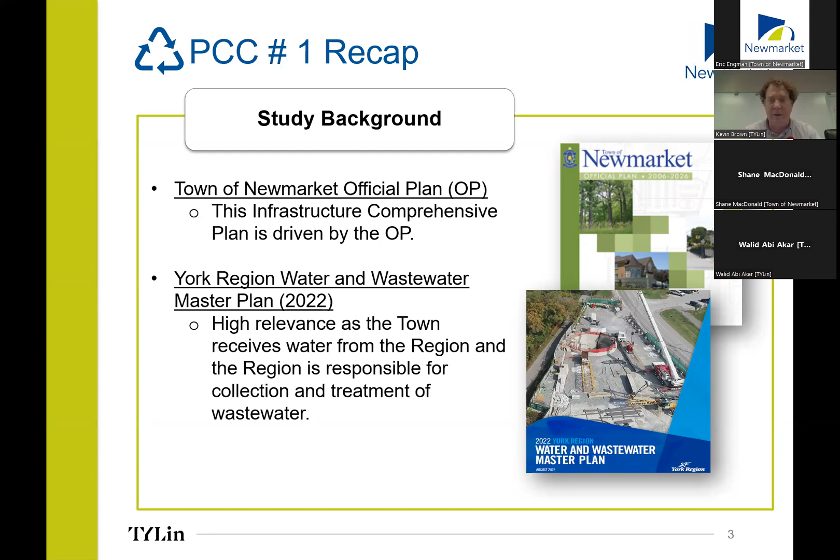While we are planning for servicing upgrades and infrastructure upgrades to support growth within the town of Newmarket, the region is also doing the same across Newmarket, Vaughan, Markham, Richmond Hill, and all the other 13 or 14 different municipalities. The overall objective is to ensure that the growth being planned for Newmarket can be accommodated without any adverse impacts to residents in terms of water and wastewater servicing.

We want to make sure that water servicing and pressures at your homes or businesses are not drastically impacted, and that the sewers have got enough capacity to convey all that wastewater out of the town to get treated properly. We've done some modeling and forecasting to identify what the water demands and wastewater conveyance requirements are going to be townwide, and we've identified some infrastructure improvements we believe are going to be required.

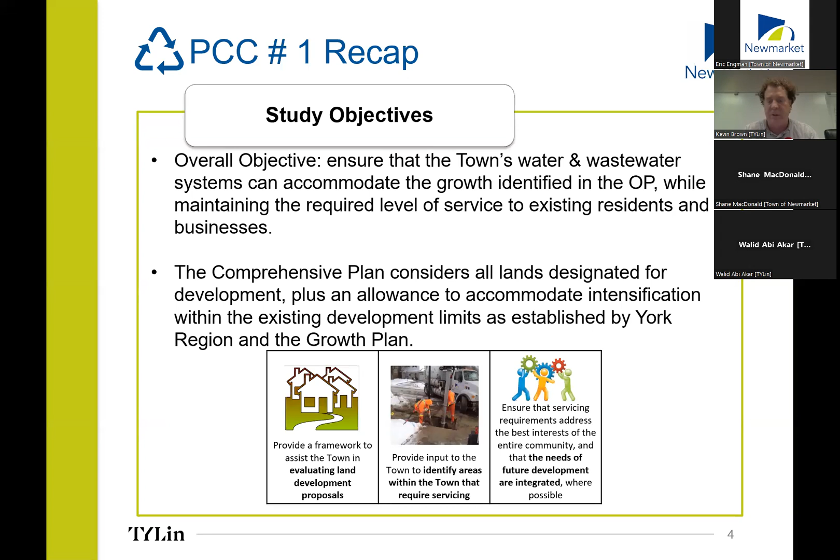The important thing to recognize too is that this growth is mandated by the province. The province has a growth plan that establishes the housing needs and population accommodation needs through the long term. These growth targets are not established by the town. The province identifies what regions they expect growth to occur in, and York Region is expected to take up a certain percentage of it. York Region, working with municipal partners like Newmarket, Vaughan, Richmond Hill, etc., establishes how much growth is generally going to be feasible in each municipality.

So what we're seeing here is that growth through 2051 will take the population from 88 or 90,000, where it is right about now, to increase by about 30,000 over the next 30 years. So a similar pace of growth that Newmarket has experienced over the last decade.

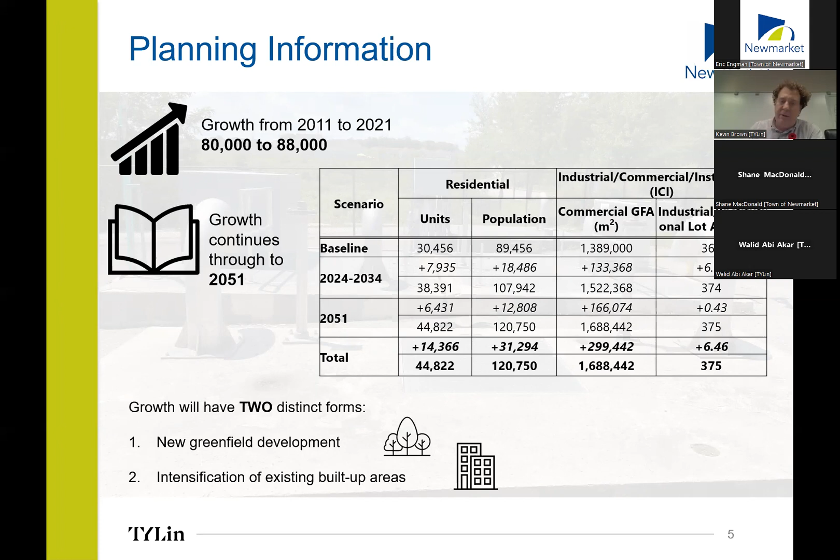Now, this master plan is following the Class Environmental Assessment process. It's a process established in Ontario to ensure that projects undertaken by municipalities go through a process where the natural environment, the sociocultural environment, the cultural environment, and financial elements are all taken into consideration. It's a bit of a weighting process that's evaluated as well, so we need to make sure we're identifying projects that have the lowest overall net impact and that are financially viable.

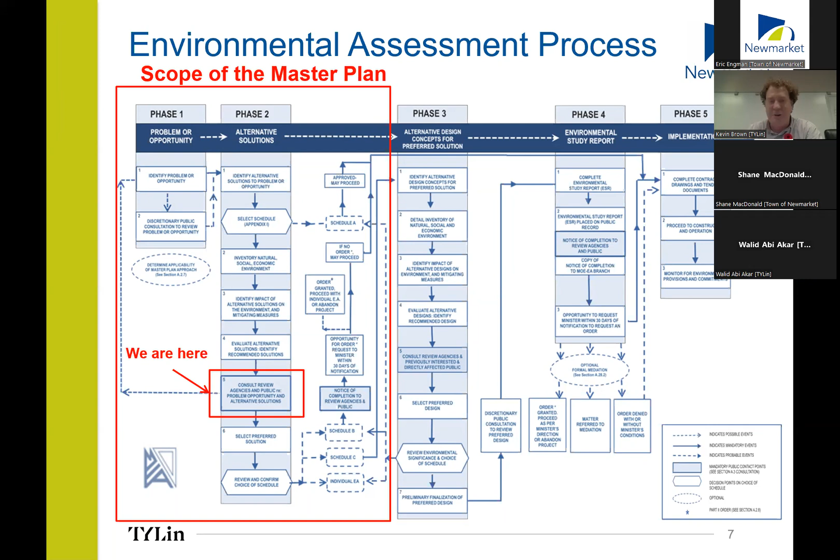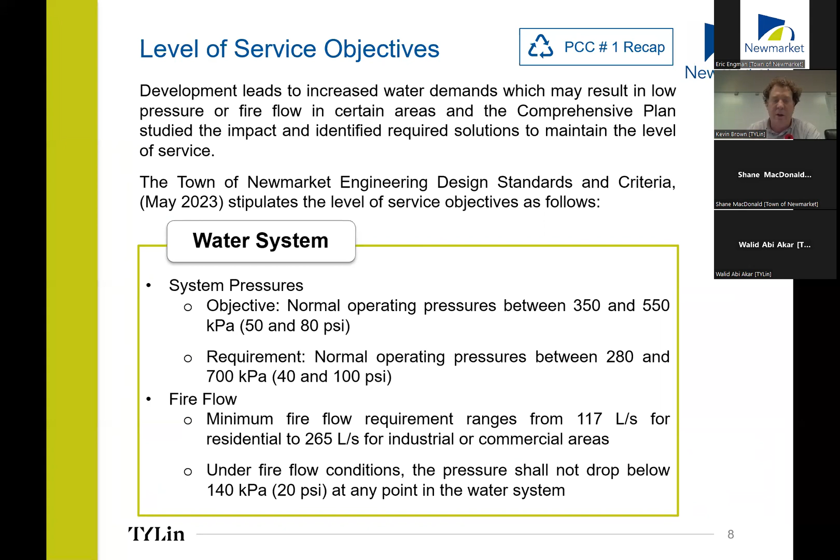Okay, so again, phase 1 recap. There are a number of level of service objectives. We want to make sure that the level of service for the water system, overall system pressures and the availability of fire flow, can be maintained. As growth occurs, as there are more users, you've got more water flowing through the pipes, there's greater friction losses, and pressures can drop. We want to make sure pressures stay within a reasonable range, and that the ability to fight fires isn't compromised by additional demands on the system.

From a wastewater system perspective, again, we want to make sure the pipes are big enough. Generally the same idea as the water system, so we can safely get the wastewater away without undue risk of sewer surcharging or basement flooding and the like.

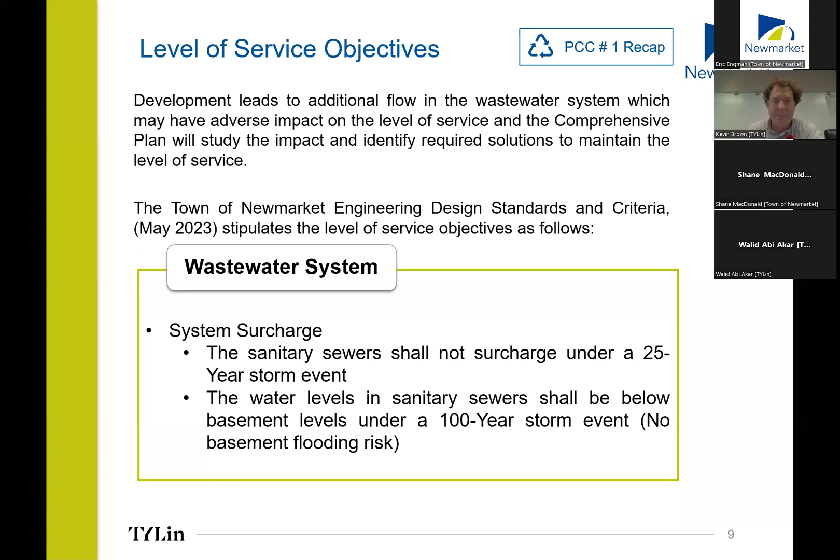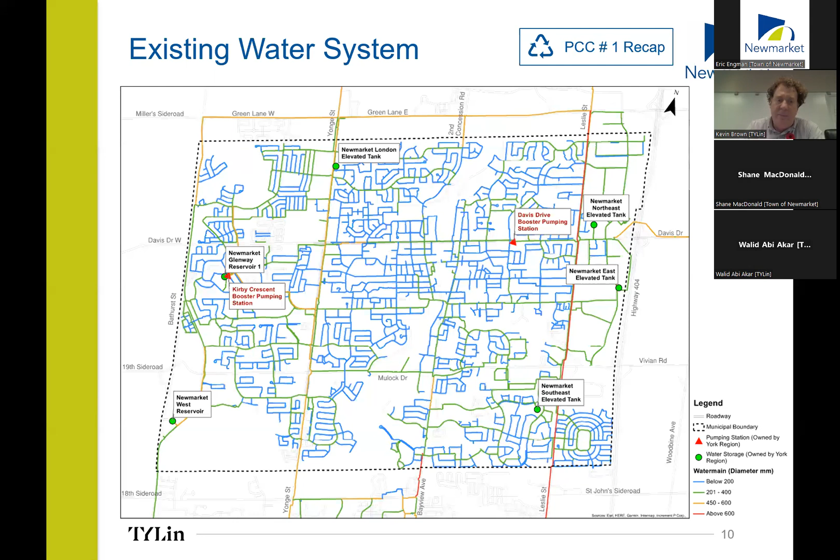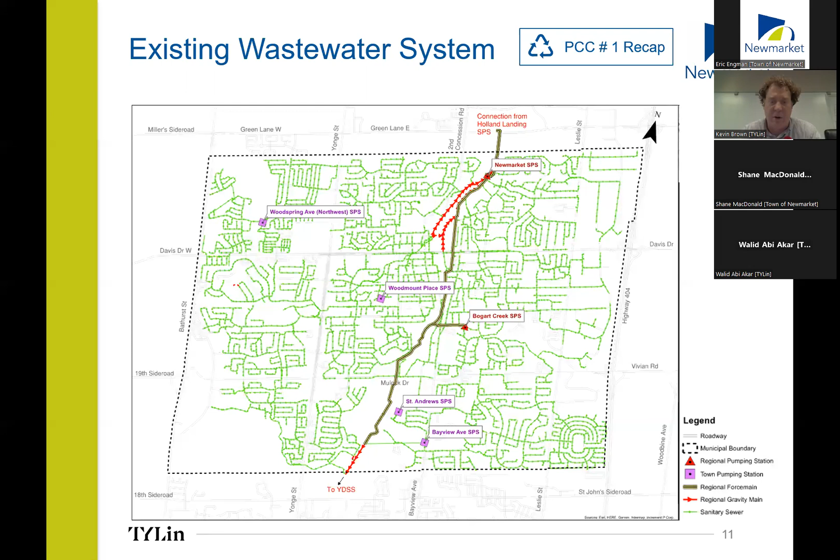So it's just an overall review of the network and the wastewater system. It's almost pretty much everything is town on this map, except for the regional trunk sewer that runs along the Holland River Valley. Basically everything flows from high to low points, so all the wastewater generally flows towards the middle of this map, ultimately connecting to the region's trunk sewer, and then gets pumped out of Newmarket through 2 regional pumping stations, the Newmarket Sewage Pumping Station in the north and the Bogart Creek Sewage Pump Station largely in the middle.

That Upper York servicing infrastructure was intended to include a new sewage treatment plant, a water reclamation center I believe it was called, up in northern Newmarket or just north and east of Gwillimbury. That project has since been reevaluated, canceled in effect, and instead of treating some of the wastewater locally, the region is going to be looking at implementing upgrades to the York-Durham sewage system, which is the major sewage collection system that takes the wastewater down to the treatment plant down in Durham region. So there will be some changes to the region's plan.

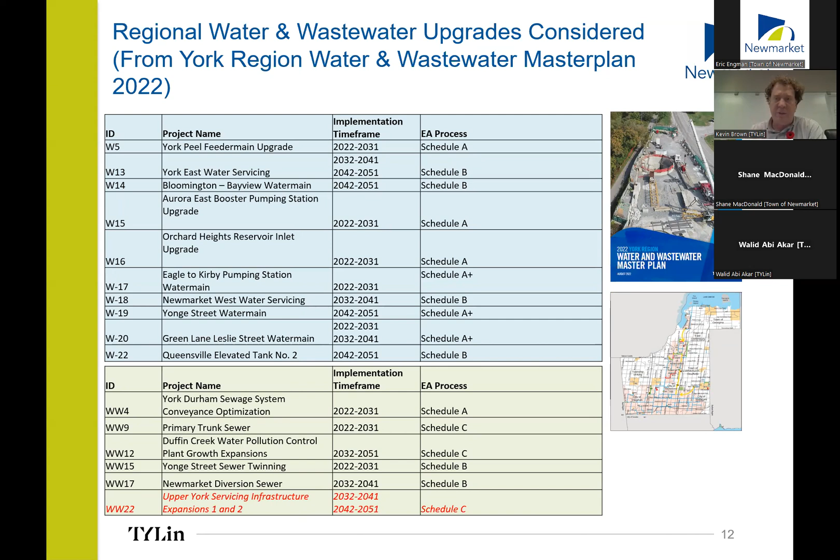The overall process: we look at a series of planning scenarios. There's the baseline, the existing conditions. Then we look at the existing infrastructure in the ground and do hydraulic modeling of the growth forecasts, where people are going to be moving to. That's where additional water demands or wastewater flows are generated from. Then we run computer simulations - really just a series of calculations. It gives us a sense of how wastewater flows increase downstream, or how pressures in the water system are impacted.

So then we do an impact assessment. We identify areas where the level of service will not be met when you combine the existing pipes with, for example, the 2051 growth projections. Then we go through a series of steps trying to identify reasonable upgrades to address or mitigate the impacts of growth.

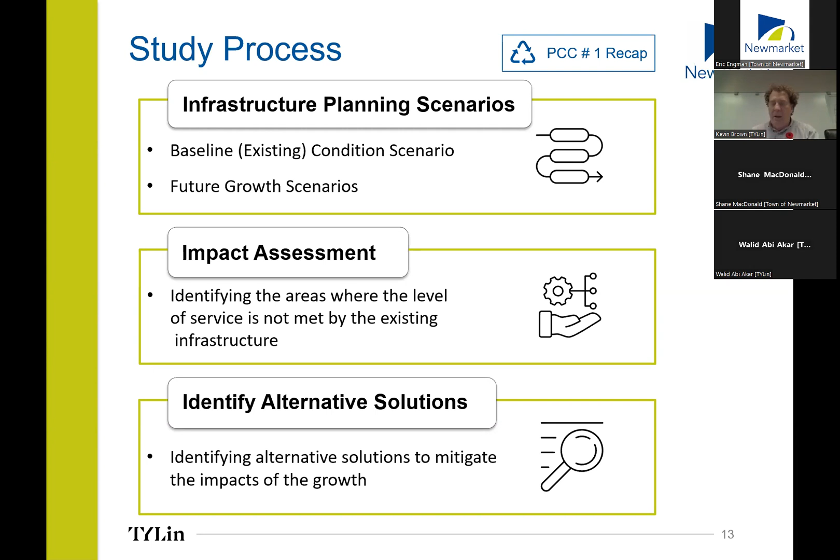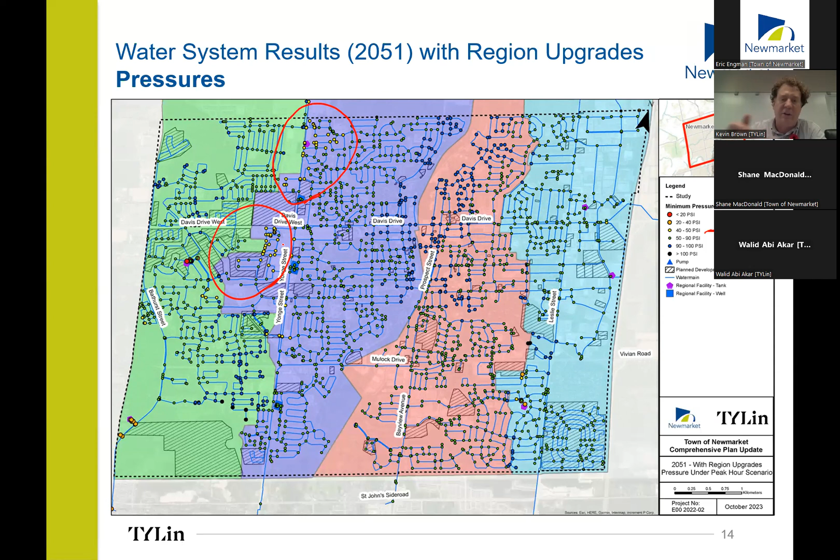There's a couple of pockets in the west in particular where we see pressures dipping a little lower than we'd like. These are areas we'd be looking to address, these low pressures that could occur as a result of development over the next 30 years.

Many of these are at dead ends in residential cul-de-sacs. It's a fairly common occurrence because if you're on a main through street, you're connected to a network of water mains, and water can flow from two different directions to come out of a hydrant. If you're at the end of a cul-de-sac, you're basically at a dead-end water main, so water can only flow in one direction. Without getting too into the theoretical details, if you double the velocity in a water main, you quadruple the pressure loss along that main. So it can be difficult to service cul-de-sacs.

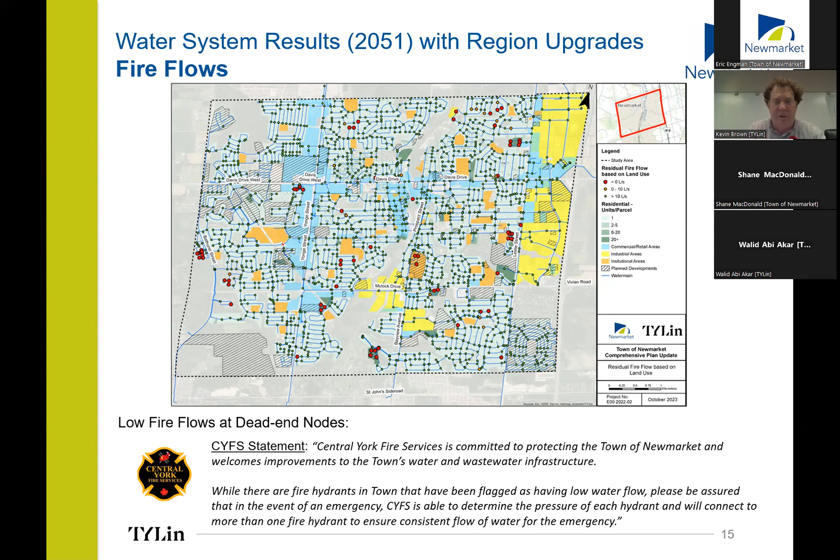So that's where we're seeing potential deficiencies in fire flows. And overall, as we identified a couple of slides back, most of the low pressure areas were located in the northwest.

This also shows the hatching. There's a bit of a greater concentration of planned developments up in the northwest, the most notable of which is the Upper Canada Mall site at Davis Drive and Yonge Street. So that's where maybe a disproportionate amount of growth is going to be occurring over the next 30 years. We've identified a few projects up in that area. Everything else looks to be pretty good throughout the town.

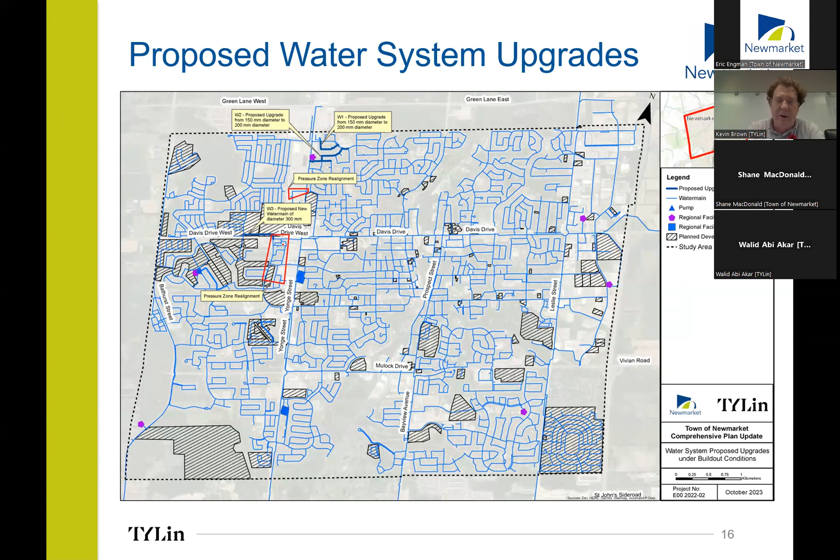I do have a little zoom in of that area to assist you in seeing what the projects are. So W1, W2, water project 1, water 2, water 3. This is not a hierarchy, we just numbered them largely north to south. So there's going to be some water main improvements to accommodate some of this growth.

We're also identifying a couple of areas in red where we're proposing to move these lands from high elevation in the lower pressure district to being at a lower elevation in the higher pressure district. So that will result in probably a noticeable increase in pressures when those zone boundaries get realigned.

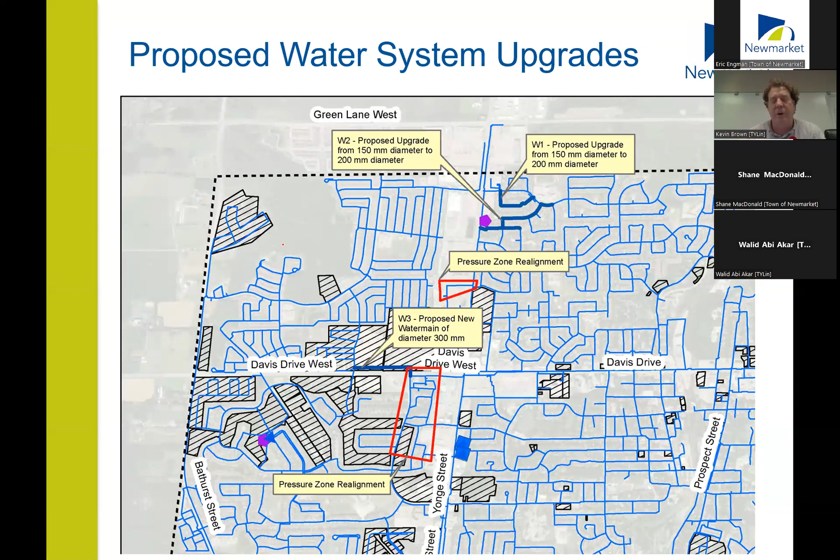But the change in pressures is largely going to be seen as a productive change or a positive change. Pressures will go up. Of course, we don't want pressures ever to be too high, because that can put a lot of strain on the internal plumbing of homes, which is why there's generally a cap of about 100 PSI. Residential plumbing, from my understanding, is generally rated to 120 PSI. So again, the town tries to keep pressures around 90 as a maximum. Anyway, a few improvements up in the northwest part of town.

Now on the wastewater side, I'll just take another water break here. Excuse me.

We try to make sure we design them for no more than 80% capacity. That way, if flows do start to creep up over time through little bits of infill development, through changes in land use, or even through systems aging and water seeping into the sanitary sewers, that it doesn't create a big problem.

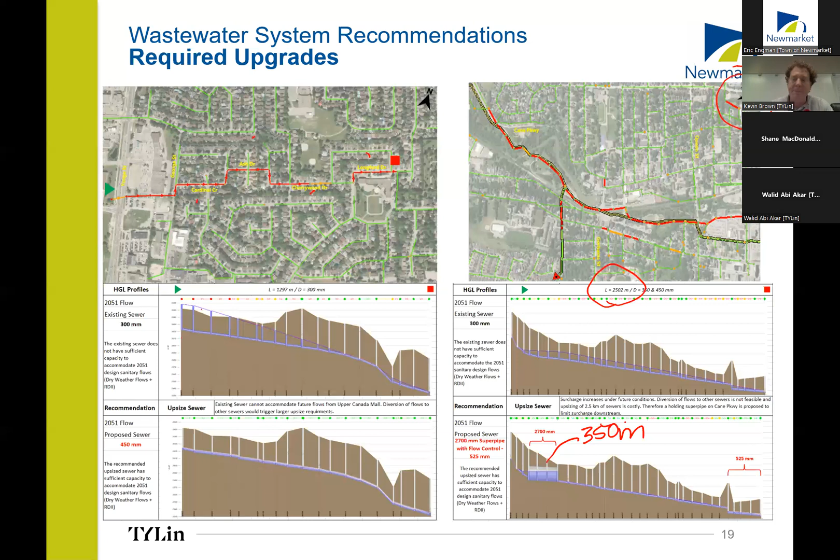So these are examples of 2 projects that we are recommending get carried forward.

Now, some of the other areas identified in those boxes a couple slides ago did have pipes identified as red, which are surcharging, or yellow, orange, which are almost surcharging. When we look at those in profile, at the existing flows or the 2051 flows in the existing sewers, there's not a huge overall impact. There's a little bit of surcharging, or getting close to surcharging, in some of these yellow segments of pipe. Over here there's a little bit greater degree, but we've got some pipes that are flatter than others, so we do see some surcharging potentially. But these sewers are relatively deep, and that degree of surcharging is minor, all things considered.

So these are projects that we're not recommending the town go ahead and undertake right away. We're recommending maybe do nothing, or in some cases we're going to recommend monitoring the sewers. One thing the town does do is monitor flows at certain locations within the sewer systems, along with the region. We're proposing that they continue to monitor and reassess the potential need for projects in these areas over time.

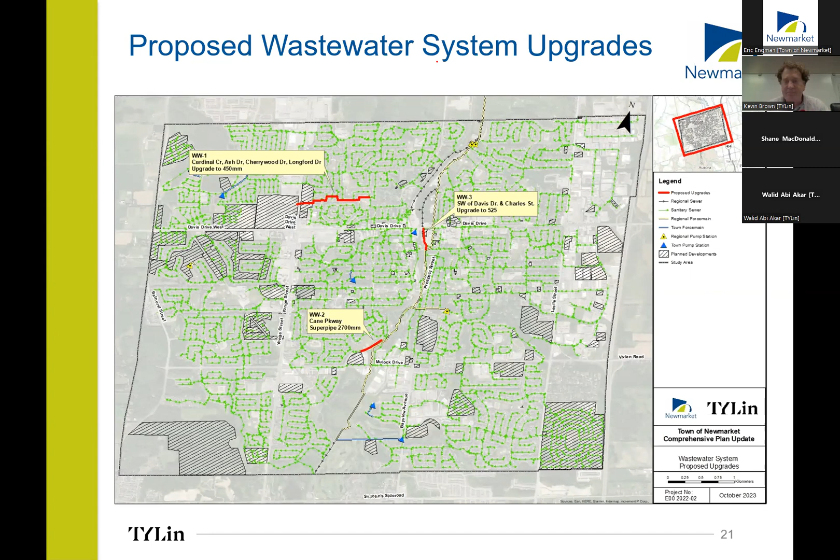So that's about it. There was a lot of work that went into this, and we've been able to summarize it in 22 slides. But as I said, we're going to update the study based on any comments that we receive through this PIC.

We're going to prepare a final report for the town, and that's going to be put on review, not just for the town, but for the stakeholders, for the residents, for all of you to review. That final report is going to include the assessment, the identification of areas with insufficient level of service.

It will also include identification of alternative solutions and recommendations, as well as an implementation plan and cost estimates. So we'll identify what it's going to cost to undertake these works. Obviously the town needs to know that so they can plan for it. We'll also try to identify roughly when we believe the projects are going to be required, whether it's tied to a specific year or to specific development blocks like we identified in some of the earlier slides.

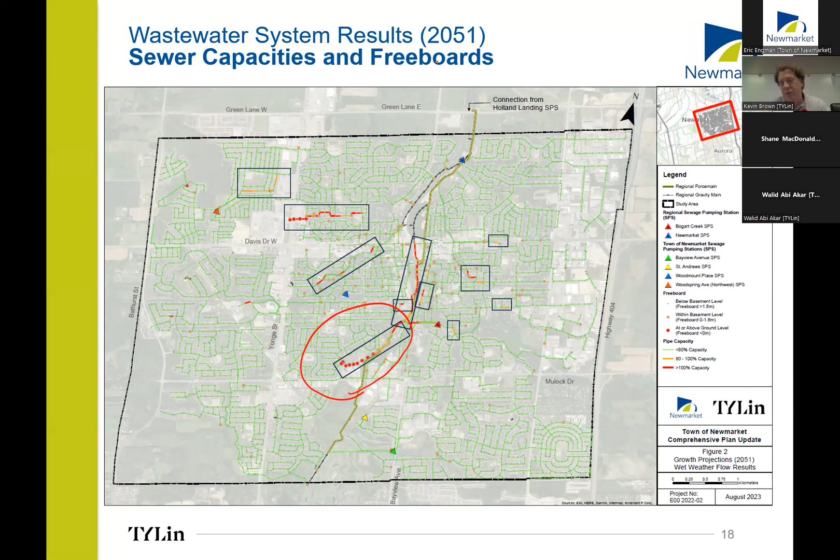I'll point out that we showed a couple of examples of the maybe 10 areas that we looked at in detail. We showed 2 where improvements are being recommended, and 2 of several where we're not proposing to upgrade the sewers. If you live adjacent to one of those other areas and want more information, we didn't want to go through all of them and present example after example.

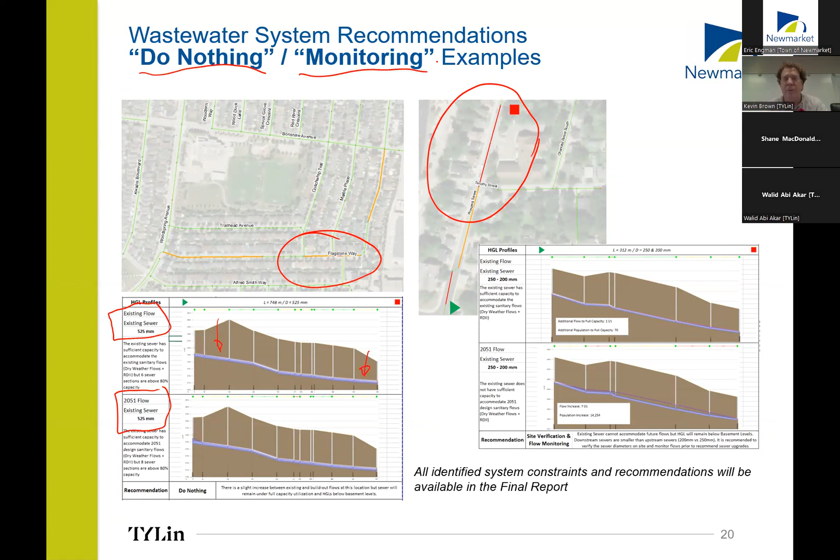But if you do have specific concerns, send us an email, and we'll send you the equivalent of these maps, these sewer profiles, for the stretch of sewer that you may have a particular interest in. That's about it. I hope I've touched on everything, and that what I shared was informative and addressed your questions before you had an opportunity to raise them. That's always best, if I can answer your questions as you're thinking about them.

Wally, you've been watching. Have there been many questions come in? There's a couple of questions on screen, right? Okay, we've got some very informed stakeholders here.

Have we considered the impact of Bill 23 as part of the growth potential? We have, to a degree. Bill 23, in a nutshell, was legislation introduced by the provincial government in the spring of this year, or late last year, referred to as the as-of-right residential zoning, colloquially. It basically allows any residential parcel to accommodate up to 3 separate dwelling units, whether it's a triplex, a garden suite built on the same property, or a lot being subdivided into separate residential parcels. So theoretically, there's potential for every residential property to turn into 3 homes.